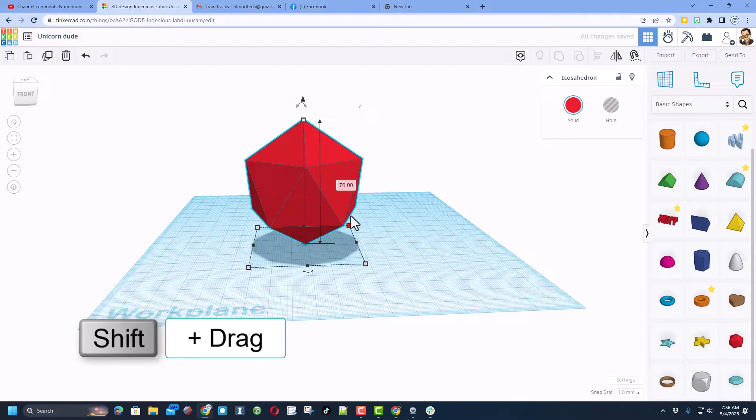Are you ready for this? Start with the icosahedron. When it comes out, I want you to hold down shift and stretch it to Crazyville, somewhere in the 60s or 70s. So like I said, we're going to make this into a dude. We'll put the face here, ears, and a unicorn horn.

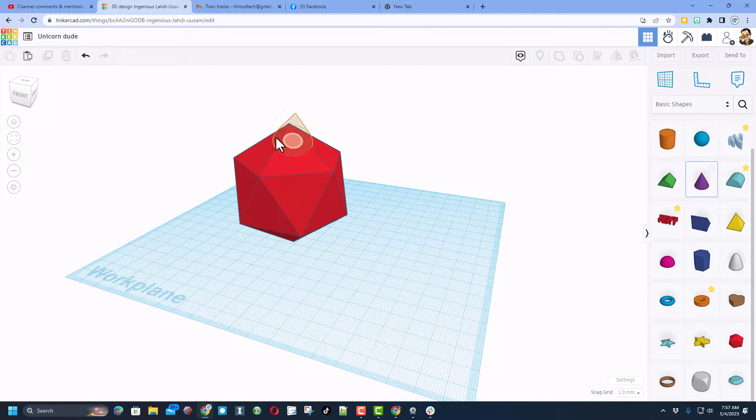Now friends, the new thing we've got is called cruising. Watch this. When I bring this out, instead of just dropping, I can move close, and it says, hey, where do you want to put it? I'm going to call this the live work plane.

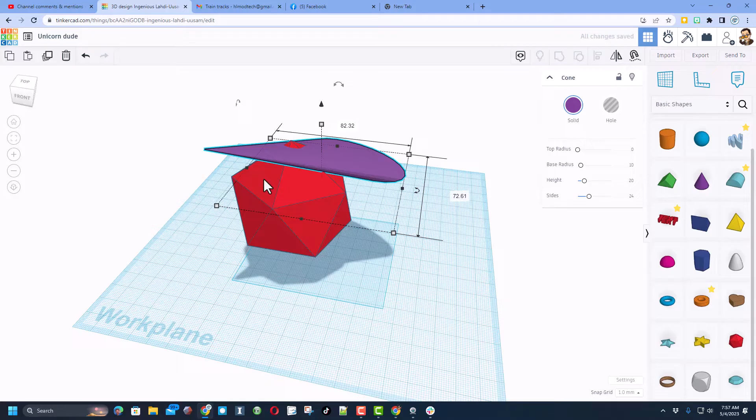So right now it stretches in this direction, in this direction. Everything is dandy on this live work plane till I click here and it goes back to the normal work plane. Now, if I stretched it, it would break it because it's not moving on that face. Now, friends, don't forget we've got undo.

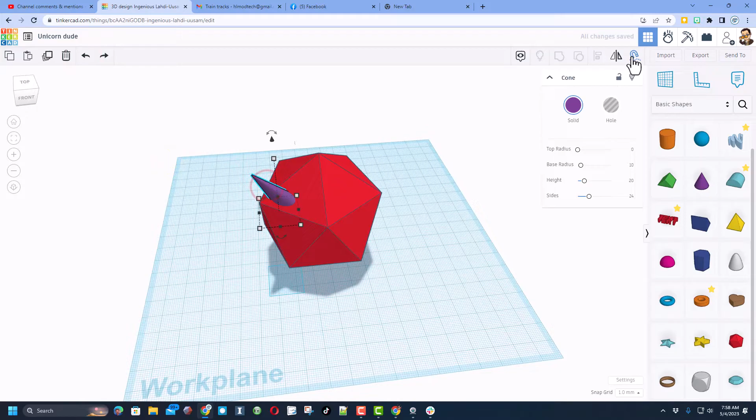So, friends, I want to move this over to where the head is. I'm going to click on Cruise, make sure that I've got it selected, and I want to move it to a new spot. Now notice I did not grab the middle of it, so it didn't work the way I wanted. Let's do this again. Once again, there's Cruise, and I want this dot. Bingo, it is in the right spot.

I've got my live work plane again, so I can stretch it so it looks more like a unicorn horn, stretches in all the directions I want. I can pick the color, and my unicorn dude is starting to look pretty cool.

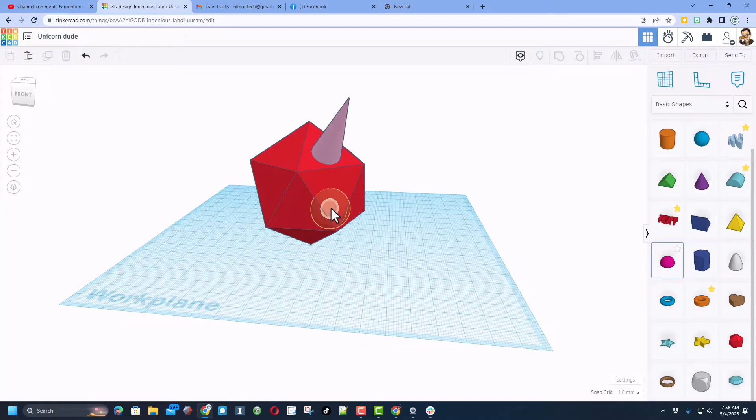Now, friends, let's add eyes. I'm going to do eyes today with this shape. Of course, we bring it out, and look at it cruise. Bingo, we want to put it right there. Once again, we've got the live work plane.

I want you to hold shift, and I want you to shrink it so it looks like that. Let's make it so it is the white part of the eye. Let's use F for fit view and make it less puffy. See how it's 4? Let's make it 3 and press enter.

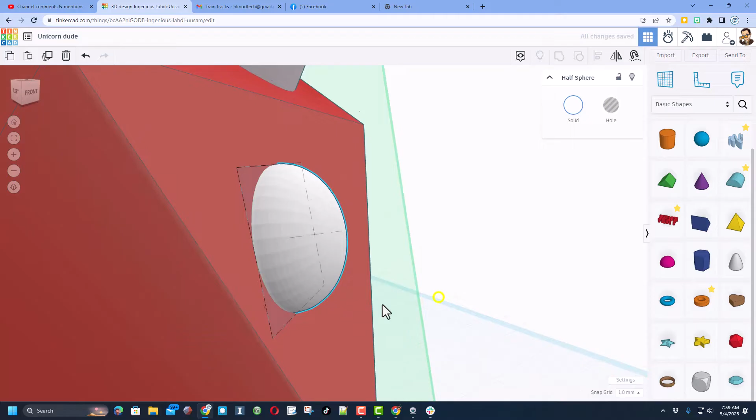And now let's add the black part, or the center, or the pupil. We're going to do that with a paraboloid. Once again, bring it close. If you zoom back out, there is our awesome live work plane.

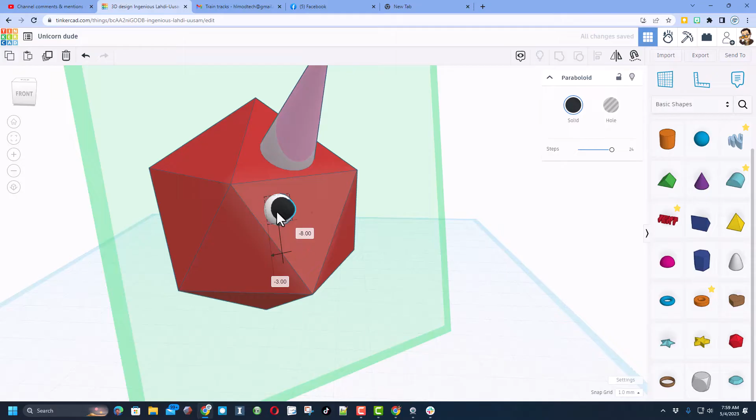We're going to make it black, hold down shift. And remember the other side was 3. Since this is 7, I know it's going to poke out. I can change it to something like 5, and bingo, we have got an amazing eye just like that.

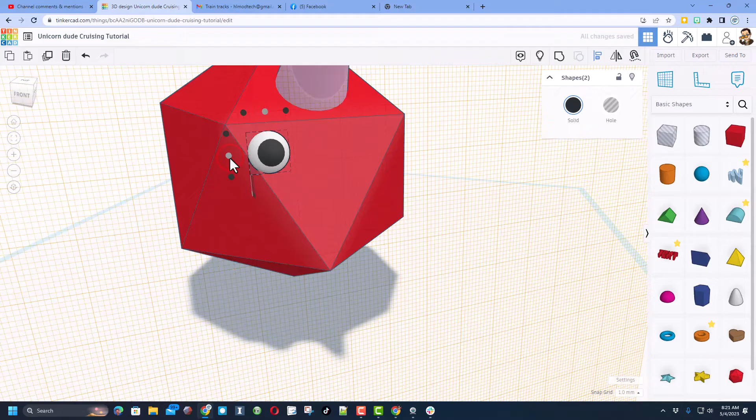Now, friends, I want to make sure these are lined up, so let's put our work plane on this face. Let's hold down shift and click on those two. Let's choose align. I'm going to make the white one the boss, and we want middle, and we want middle. Then make sure you hit group. Notice it changes to one color.

It may be white or black. If we turn on multicolor, bingo, they are just the way you want. Of course, then do Control D and use your arrow keys or even Shift nudge to move them where you want. How cool is that?

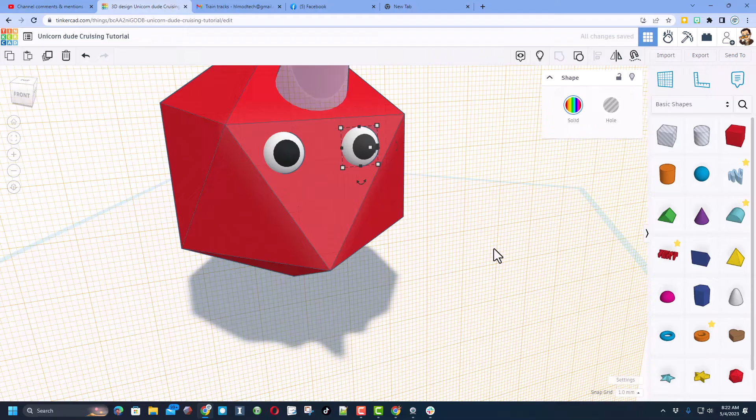Now I'm going to put the work plane back on the ground. Let's give him a nose. I'm going to do it with the pyramid. Once again, I'm going to hold down Shift and I'm going to squeeze it so it's small like I want. You can use the arrow keys or you can just move it where you want.

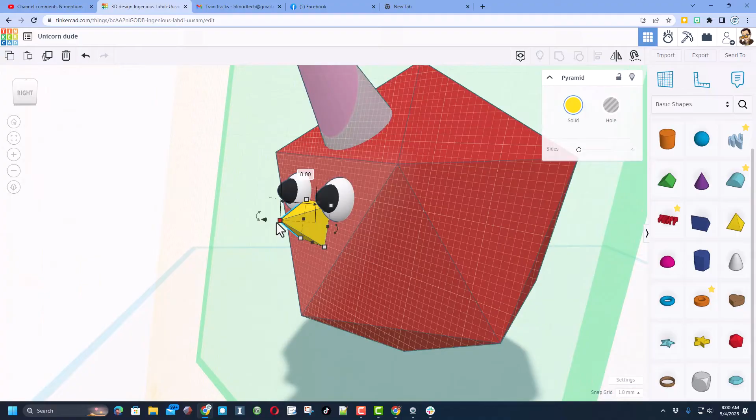I'm going to look at it from this side by doing orbit. This is a right click drag. And I'm going to stretch it out.

Friends, next up, I want to give them a mouth. It's going to be a scribble mouth. Bring it out here and drop it just like that. Now, you can scribble and draw the most awesome mouth ever. If you don't like it, you can always hit clear and start again.

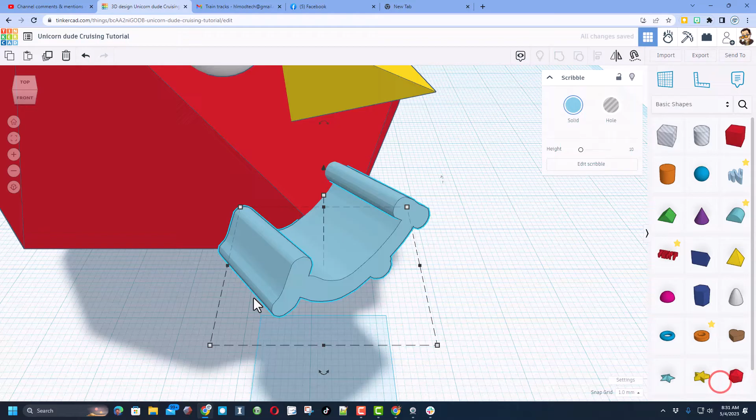When you have got your fun mouth, I'm going to give mine a little tongue, and let's hit done just like that. Notice I just lost my cruising work plane accidentally. This is so cool though, we can get it back by simply clicking the cruise tool, finding that middle one, and bang, there's our live work plane.

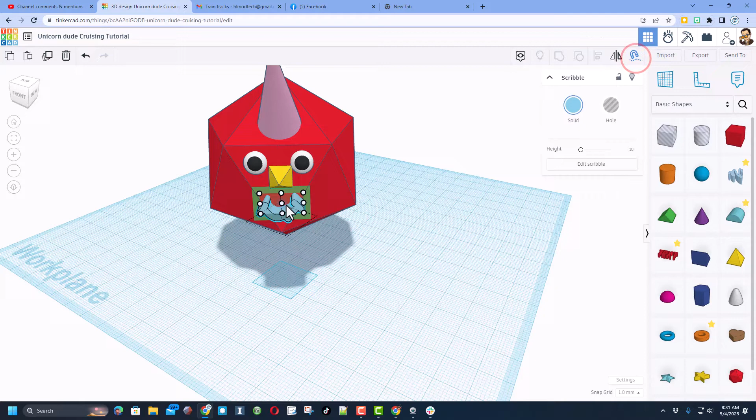Now we can stretch and adjust to get it just the way we want. Once again, I lost it, so I'm just going to grab that and then put it back from that center. Now I'm going to shrink it down to the right size. I'm going to pick a fun color. I think that works pretty groovy. And we have got a mouth on our unicorn person.

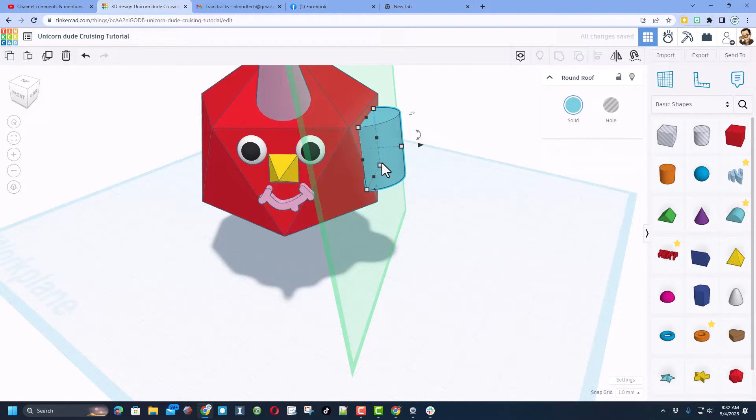Next up, I want to add ears. We're going to do that with this. Bring it over. Let's look at it from a corner. Find that rotation handle. Notice because of the live work plane, it goes just the way we'd expect, and we can snap it right where it needs to be, adjusting until we've got the exact style we want.

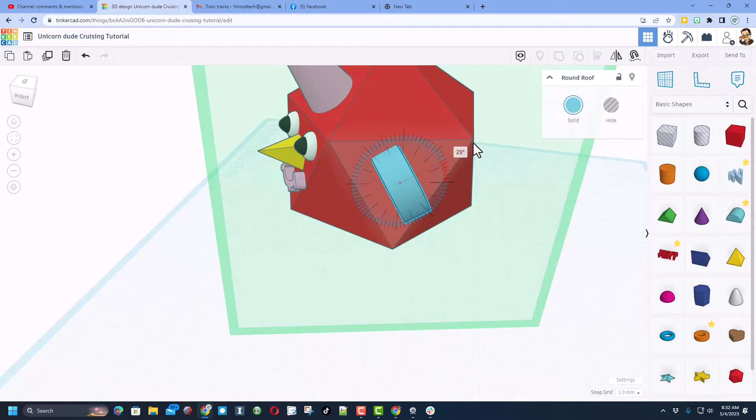Remember, if you're inside that circle or by the shape, it goes 22.5 degrees at a time. If you're out here, it goes 1 degree at a time.

Pick your color that you think is awesome. I am going to go with a bright pink, or even better yet, I'm going to go with a custom pink. These are so much fun. And then, are you ready for this?

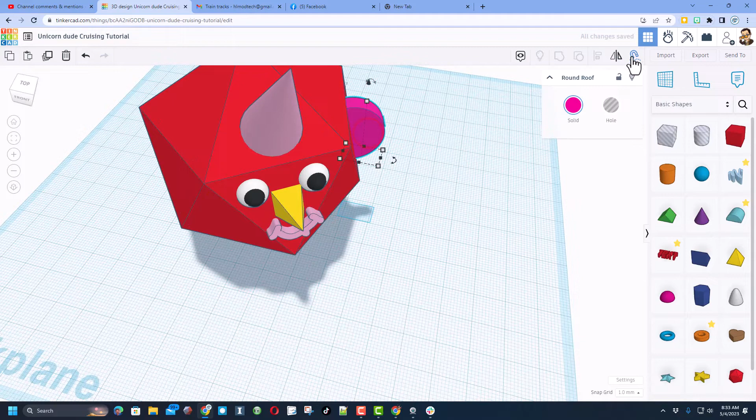We are going to do duplicate, which is Control D. And then if we click on that and we do cruising, we need to make sure we grab the middle one, and we can move it right over to this side. I'm going to cruise again, even from this crazy angle. I just need to grab the middle one, and bang! We can set it right there and rotate it so it's the exact angle that we want.

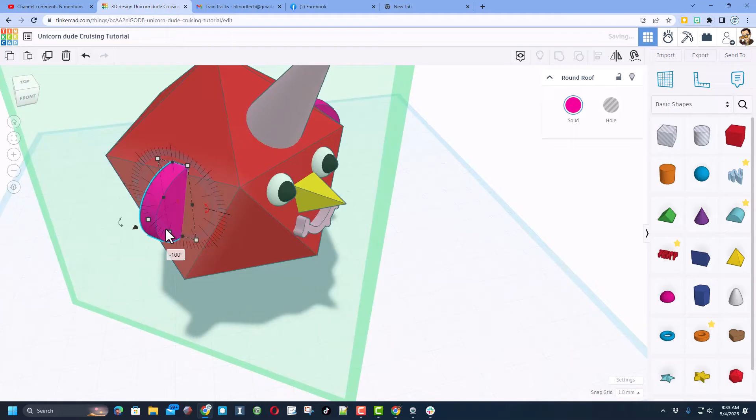How cool is that? Instant movement to the spot we want, and because of the live work plane, you can adjust it to look just like you want. Friends, I'm going to put the work plane back down on the ground. I'm going to click on my unicorn person's body, and let's give him a custom color over here too.

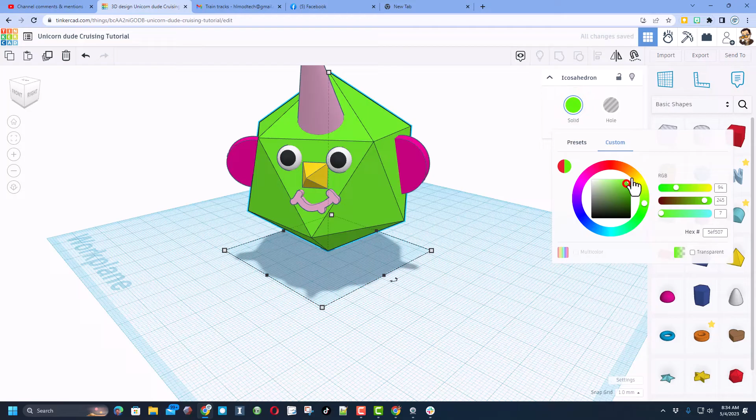Let's go with a crazy funky green. That, I think, is pretty darn awesome. Let's quickly give him some feet. If you bring out a half sphere and stretch it so it looks a bit like a shoe, you can bring it into place just like that. Click duplicate or Control D.

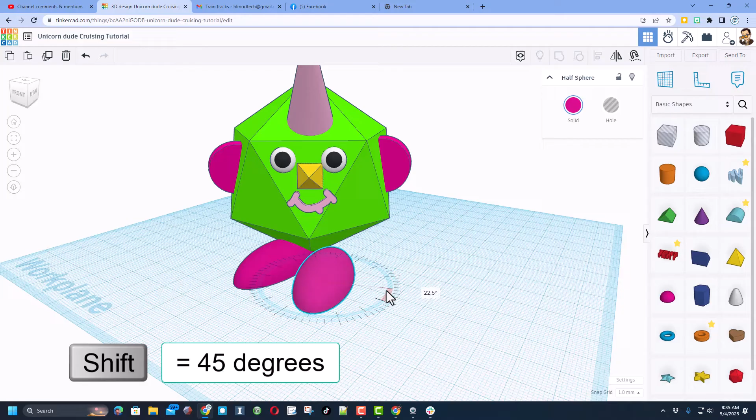I'm going to use the arrow keys to move it. Let's use the rotation handle to twist it. If you stay inside, it's 22.5 degrees at a time. If you come outside, it's 1 degree at a time. If you hold down Shift, it is 45 degrees at a time. Get them so they are how you like them.

I'm going to now grab and select both of them. And I'm going to rotate a little bit so they line up with the head. You can have them however you want. Just like that, our unicorn person has got feet.

Now, friends, this is where it can get super cool. You can draw hair, give them hats. Don't forget, if you go down to creatures and characters, there are awesome things like silly eyeballs. You've got glasses. You can add a mustache. When you bring out the mustache, bingo, it lands on that face.

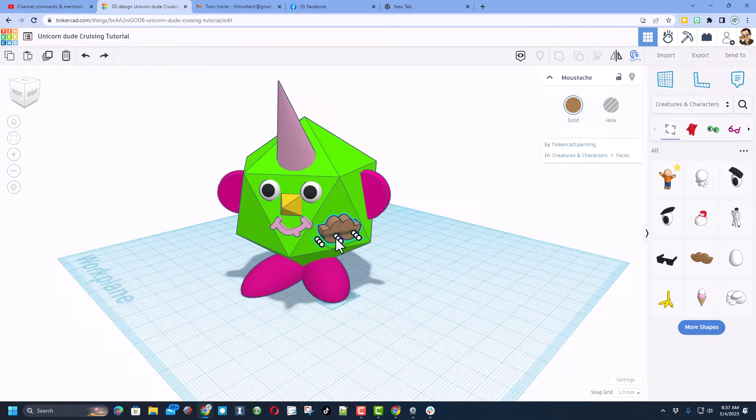Don't forget, if you want to rotate it, you can do Shift Rotate, and it goes 45 degrees at a time, so it lands just the way you want. And then, of course, you could shrink it. Don't forget, friends, if you want it on the other side, we can now cruise, choose middle, and bingo, drop it right where it needs to go.

I'm going to zoom in so I can get that handle, and we're going to do 90 degrees. Bingo, mustache added. How fun is that? Now, I'm going to delete that because I want you guys to add all the amazing things. The next thing I want you to remember, though, is how to make it so the rest of the world can see it.

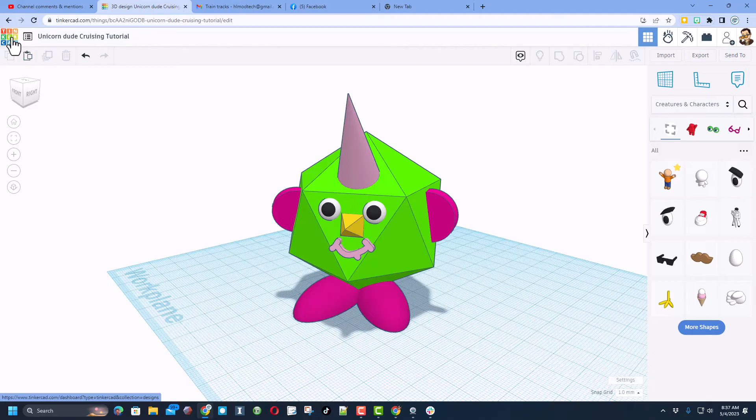Friends, if you click the Tinkercad button, when you return to the main menu, there is a gear. Click on it and give your unicorn person a name. As you can see, I've given mine the properties of this tutorial coming soon. I've given it all sorts of tags. Don't forget, if you tag it with HLMT23, I check that every day to see what new designs were shared.

And then finally, friends, make sure you make it public. And friends, I always choose no derivatives because I want you to come up, follow the tutorial, and gain some epic skills. Make sure you hit Save Changes and check it out if you go to the gallery.

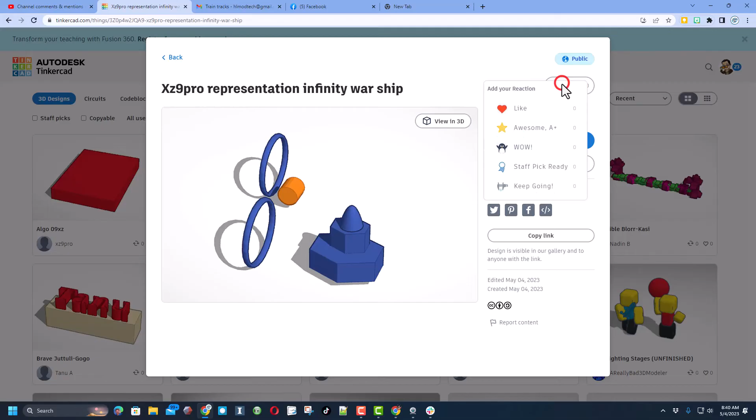These are the awesome staff picks. I'm going to tell you to shut those off. And if you check recent, somewhere in the list, you'll see your awesome project. And of course, people can give you reactions. While I'm here, I'm going to find a design I think is awesome. And of course, I'm going to give it a reaction. Remember, friends, you can always click on the designer and see all of their designs at once.

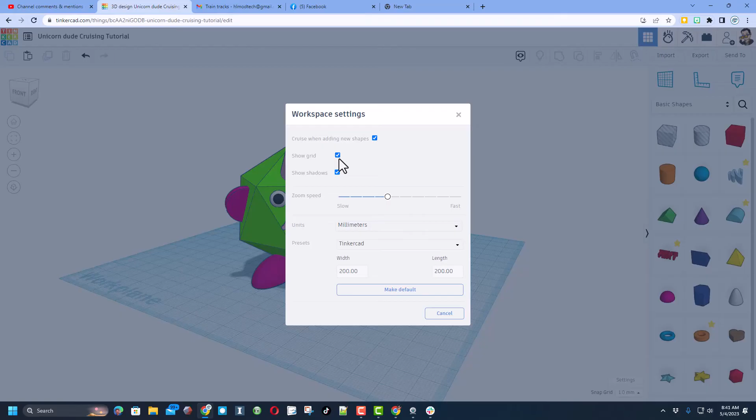As I wrap up, friends, I really hope that you push these to crazy levels. I'm looking forward to seeing what you see. I do want to let you know, if you do want to shut off cruising, you can do that right there. I also, when I'm done, like to shut off the grid because I think this is a cleaner view for screenshots.